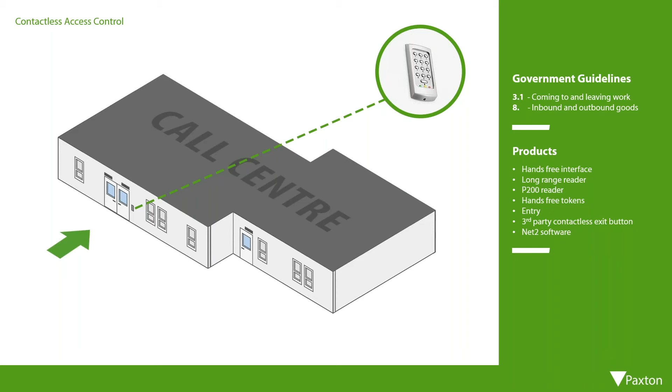With this level of traffic, everyone having to touch the keypad and the door handle to move through the door represents a risk.

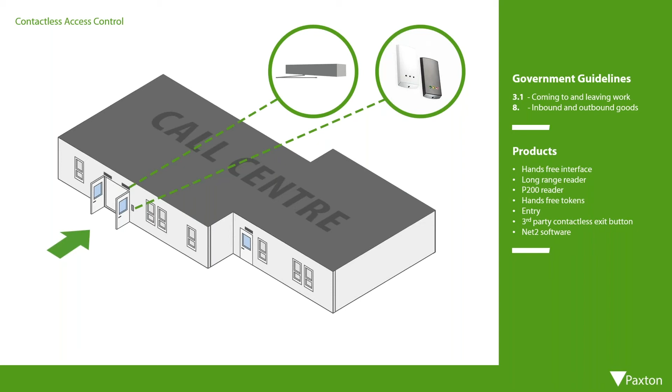The use of a Paxton proximity reader and an automated door opener and closer reduces the need for anyone to touch the door. The same can be applied to internal doors.

If the door is not set up to be read in and read out with a second reader, a simple low-cost, no-touch IR exit button can be installed.

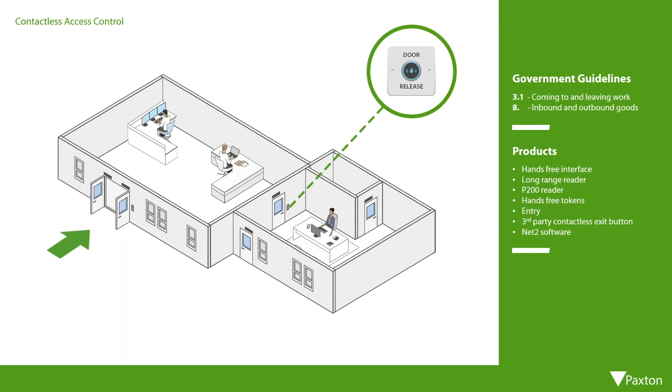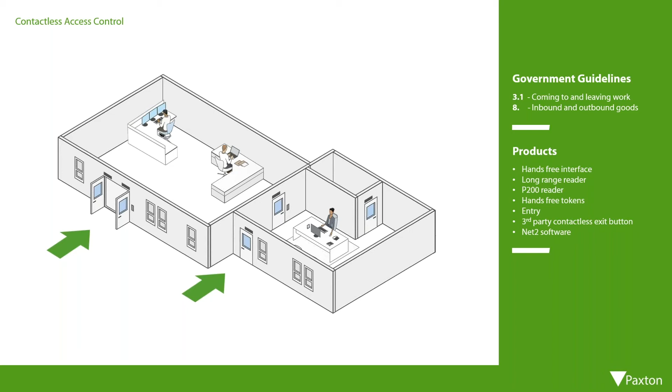The opportunity to add access control to an additional entry and exit point and reduce traffic per access point will reduce the risk of transferring infection to others.

A further option is to have the ability to open internal doors, shutter doors for deliveries, or perimeter gates automatically from a safe distance. This can be achieved by utilizing long-range readers or hands-free interfaces.

Our second solution is to look at the flexible access permissions within Net2. By building a solid knowledge and understanding of the possibilities with Net2's flexible access permissions, we gain the most comprehensive coverage of the government guidelines across all industry sectors.

Effective use of Net2's access permissions can allow us to adhere to sections 3.1, 3.2, 4 and 7.1, and this is possible by using the software to support staggered start and finish times.

By adjusting time zones, we can reduce the number of people entering and leaving work at the same time, enhancing the possibility of maintaining social distancing and reducing congregation around common entry points.

We can facilitate the creation of one-way systems in buildings to aid social distancing, again removing the ability to pass back through doors in narrow walkways.

Only allow access for specific approved people to aid the management of return to work. This ensures only permitted people can return to work and denies access to people who are not permitted to return.

We can allow segmentation of staff in order to prevent cross-contamination, restrict permissions to essential areas only, and deny access to common areas or areas in which distancing measures cannot be maintained.

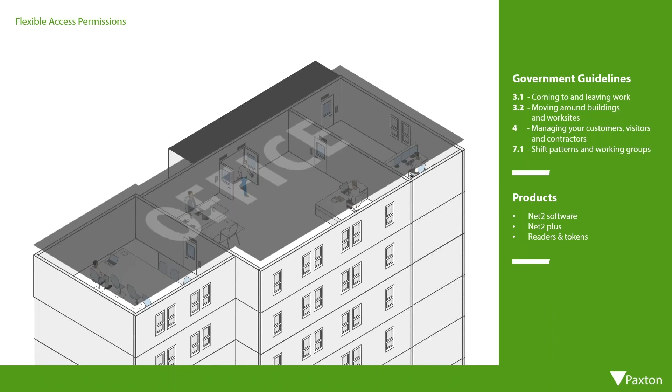Net2's flexible access permissions allow us to manage shift patterns by adjusting the start and finish times of individuals or groups in the time zone section of the software. By implementing such changes, we can reduce the number of people at common entry or exit points at the same time. In addition, you can adjust access levels to only allow access to the appropriate people at the appropriate time via the designated entry and exit point.

By building different groups of users, a separate entrance point can be determined for visitors to ensure staff and visitors remain separated until in a safe meeting area.

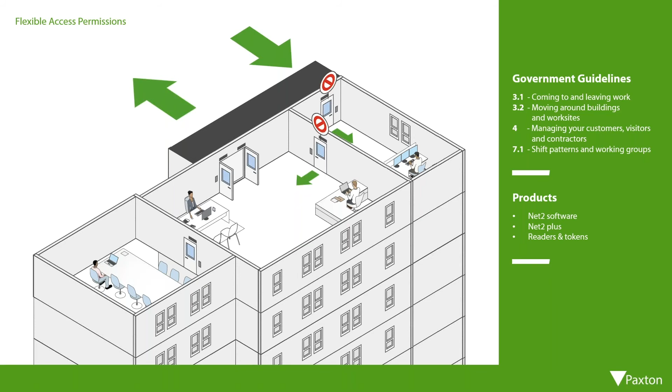Specific reference is made in the government documents regarding creating a one-way flow of people to support social distancing. By working in combination with visual aids such as signage, a one-way flow of traffic can be enforced by adjusting access levels or disabling exit buttons as the mode for exit.

Only allowing access for specified people to aid the return to work process can be implemented by updating the user record with the valid from date in the user profile.

A further step could be to update their profiles with key information, for example, the date they've been tested for infection. Access rights can be set to expire at a specific time or date in which people need to provide updated test results.

Sites can be separated into different work zones, multiple floors or buildings by creating door groups, ensuring that specific departments can only enter their designated workspaces. By using door groups, system administrators can see departments, floors or buildings as a group of doors to which access levels can be applied to manage as necessary.

Our third solution is to look at the effective use of occupancy management. This is a newly developed feature for Net2 released in version 6.04 on July the 7th and has been specifically developed to help protect against COVID-19. The way this feature works is very similar to using roll call within Net2.

Occupancy Manager aids social distancing by restricting the number of employees that can enter a workspace or area. The Occupancy Manager can be used in several different scenarios. It allows us to control the maximum number of people in any area to aid social distancing. This is useful when managing areas of a building that have many people working in and moving throughout it.

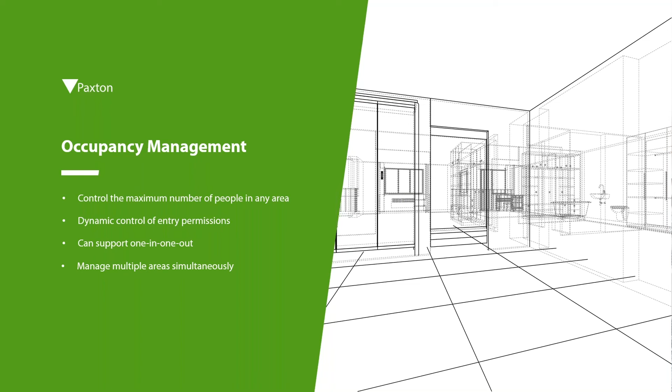You can have a live report for each of the area showing current occupancy levels. In Net2, you can create a viewable web page, which means you can easily browse to it via a network monitor.

You can use the Occupancy Manager in combination with input-output boards to trigger a traffic light system to help give a clear visual indication when an area is free to enter or at maximum occupancy. This feature is backwards compatible and will work with the Pro software only.

The Occupancy Manager feature allows us to adhere to points 3.1, 3.2, and 4 of the government guidelines across each of the industry sectors. To provide an example of its use, we'll look at a potential installation on a construction site.

At a managed entrance and exit point to the site, we see people using their tokens to pass through the turnstile.

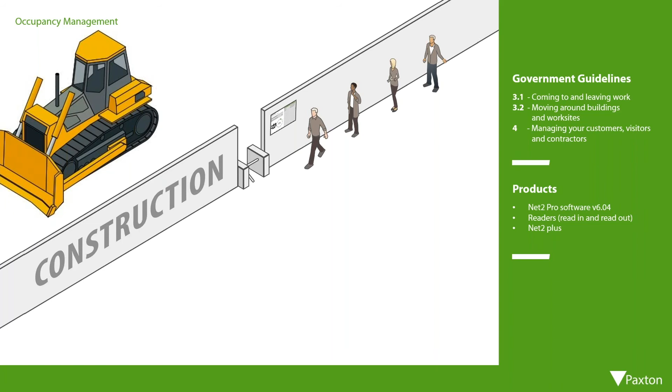At points across the site, screens are visible to see the current occupancy levels on site, and the traffic light remains green, giving a clear indication that access is still permitted. At the point that the occupancy level is reached, access has been denied to the next person at the entry point. The traffic light turns red and the foreman of the site has received a message alert.

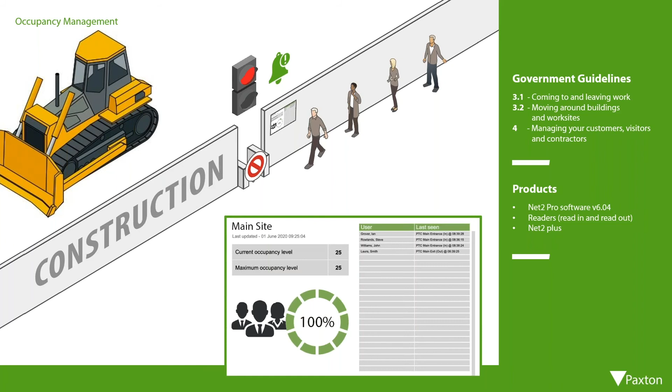A further example of using the occupancy management feature would be to look at a typical manufacturing facility where we have multiple people moving around a building that's been partitioned into specific functional areas. We can see here we're able to segment the different areas of the building by identifying the dedicated entrance and exit point per area, and that we can have multiple screens designated to each area. This means that multiple areas can be monitored live at the same time.

Our fourth solution for today's webinar is regarding the use of Net2 in combination with thermal scanning. Currently in the industry, thermal cameras are seeing a significant rise in demand directly due to the symptom associated with COVID-19 of a consistently raised temperature.

It's important to note that thermal scanning alone does not address any of the government guidelines. However, by utilising thermal scanning in combination with access control, we're able to introduce an opportunity to further reduce risk in the workplace by denying access to people identifying with a heightened temperature that may put others at risk. By doing so, we can help confirm all staff and visitors do not have a fever before entering the premises, and we can protect staff from infection.

At this stage, the integration is a hardware-only integration. Further work is taking place to enable database exchange to cut out the need for dual enrollment. This will be released in the coming weeks. The application notes of how to build the integration will be available after today's webinar.

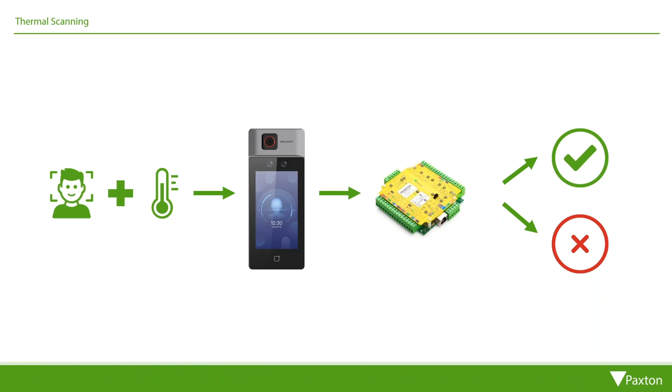To illustrate the effective use of the integration, we'll use the example here of a research facility. We have a thermal scanner at the entry point within reception and one set up at the entrance to a specific laboratory room within the premises. The entrance is managed by a turnstile, and upon the presentation of a valid token and a thermal scan under the threshold, access is granted.

By having a second scanning point, we can identify if anyone develops symptoms whilst in the workplace. Should access be denied, that individual can self-identify to the relevant person or department and then follow their own company guidelines.

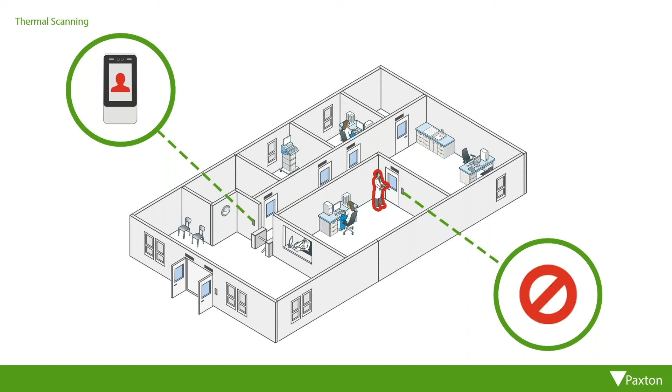In September, with the release of software version 6.05, we launched another new feature for Net2, which is checkpoint control. This supports COVID secure sites and helps protect staff and visitors by monitoring and approving people as they return to work.

Checkpoint control allows you to create checkpoints within a building where staff and visitors must be validated before they can access other areas, which helps enforce health and safety guidelines and protects user well-being.

A site can assign temporary access levels to one or more users, which will remain in place until they have been validated, allowing them to move freely around the building. This can help ensure they are wearing adequate personal protective equipment, have had a safe temperature check, or completed their return to work induction.

The new feature allows Net2 to be configured so that users can only access reception or a designated area before a full site validation. Once additional safeguards have been met, the user has been validated through the Net2 software, and usual access rights are reinstated for as long as required.